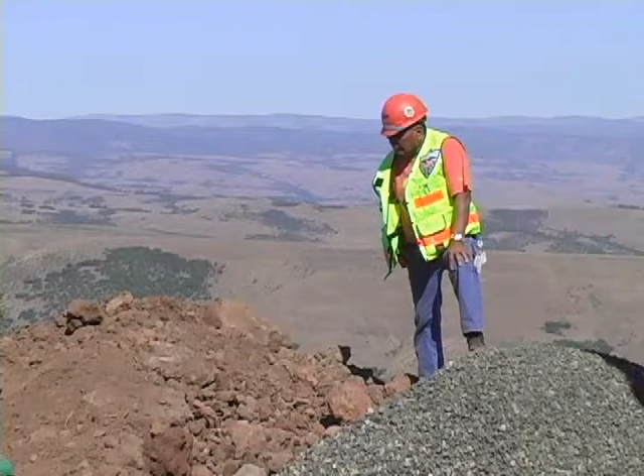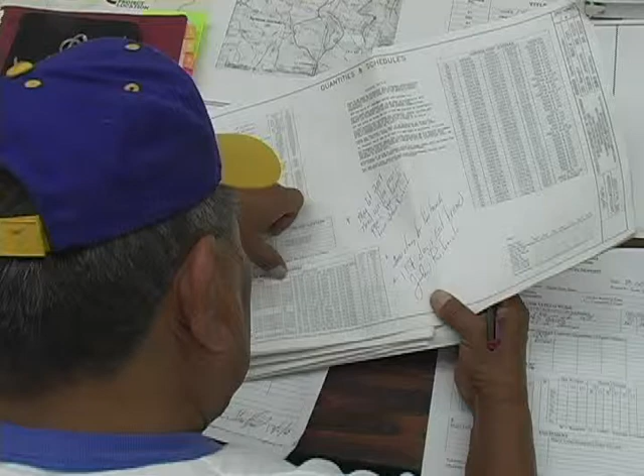The Road Construction Inspector, or CI, has a very important job to do. It is up to him or her to make sure that a road construction project is being carried out as planned, in every detail. Without proper inspection, the final product, which is a road that thousands of people may travel for many years, could fail.

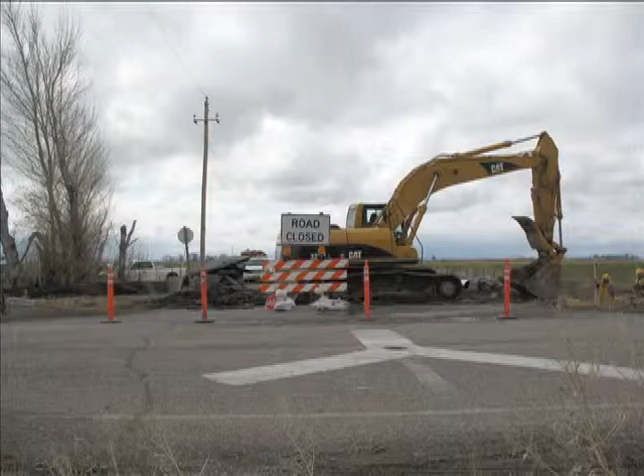This failure may cost your tribe thousands of dollars to repair. Even worse, it could cost residents of your reservation their very lives.

Welcome to this presentation on Tribal Road Construction Inspection and Documentation. During this program, we'll explain the duties of the construction inspector and demonstrate the proper ways to carry out those duties. We'll closely examine the various reporting forms and other documents that you'll be using both in the field and in your office.

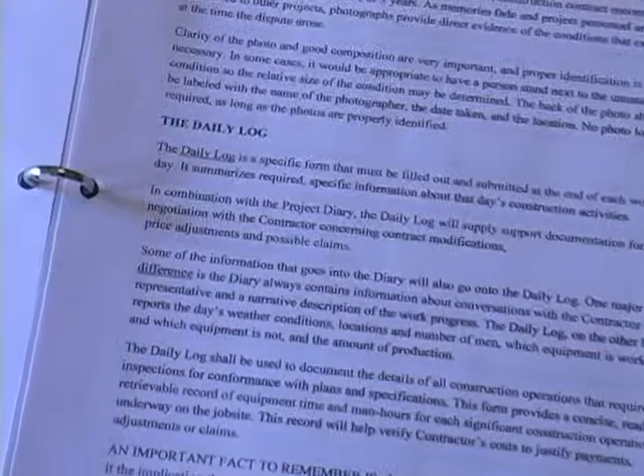The information we're presenting here is also available in the Road Work Ahead guide that accompanies this DVD, which contains more in-depth information on this subject. The guide also contains definitions of some of the terms we'll be using. We've got a lot of ground to cover here, so let's get started.

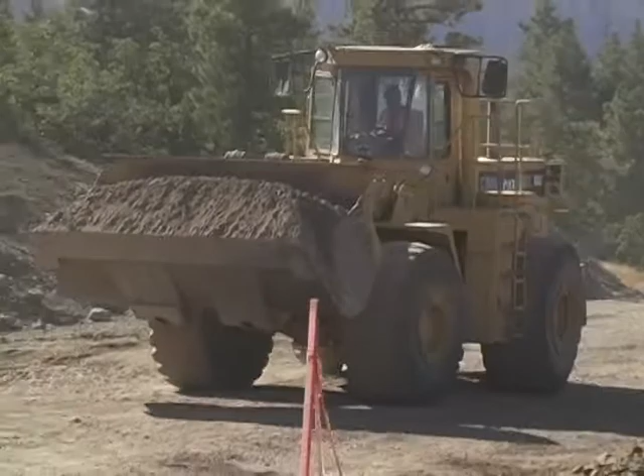To be a construction inspector, there are three basic things you must be able to do: observe, record, and communicate. That is, observe the details of what's happening at the construction site on a day-to-day basis. Record what you observe in a standardized way on a regular basis, and communicate what's happening to other individuals and agencies that need to know.

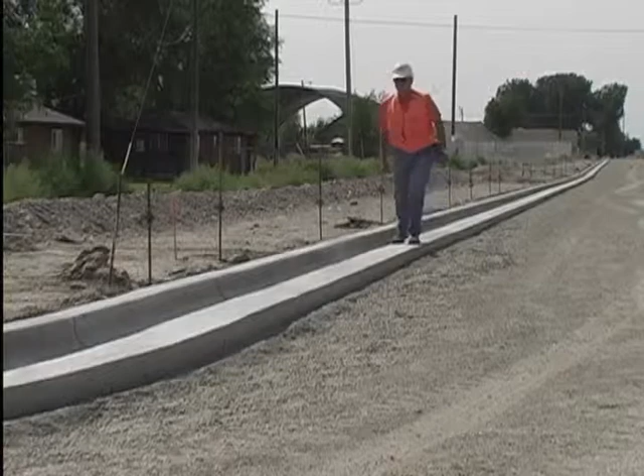In order to do the job properly, you should be the first person on the site each morning and the last person to leave at the end of the day. That way, you don't miss any critical construction activity. The main purpose of these tasks is to be able to confirm and document that the construction contractor is complying with the terms of his contract, which assures overall quality of the project and allows the project owner to make payments to the contractor.

Every approved construction project starts with a set of plans and specifications that provide the details on all aspects of the job. It is part of the job of construction inspector to be thoroughly familiar with these plans and specs. So, before ever going to the construction job site, the inspector must take time to review these documents and mark up or use post-it notes to cross-reference items to watch.

Every construction project accumulates various documents as the project progresses, and these documents must be organized and safeguarded, so they are usually kept all together in the project master file. This file box is something an inspector needs to access almost every day during a construction project. Now let's review the official duties of the construction inspector. If you have a copy of the guide, you may want to follow along in Part 1.

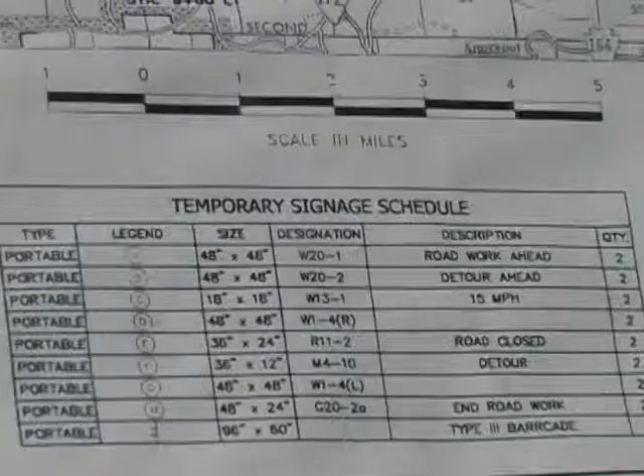Number 1. The inspector must be able to read, comprehend, and interpret all elements of the project plans and specifications. This includes such items as addenda, change orders, detail sketches, temporary traffic control plans, erosion and sediment control plans, as well as sampling and testing schedules. For definitions of these items, check the glossary in the back of the accompanying guide.

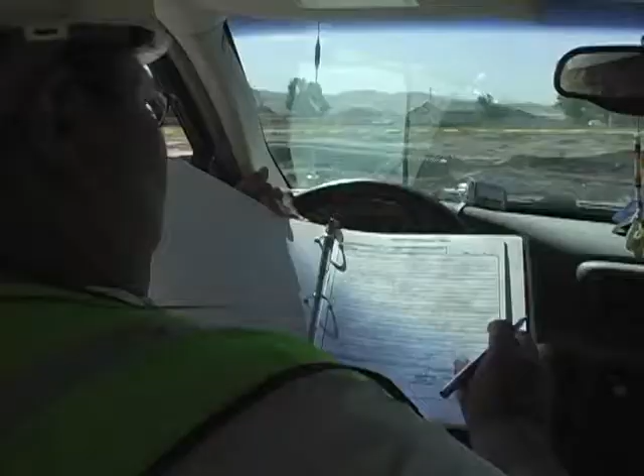Number 2. The inspector must keep and maintain daily construction reports of field observations of construction activities, materials, testings, equipment, employee working hours on the project, delays, weather conditions, unusual activities or events, mishaps, and accidents that occur at the job site, all being referenced to centerline stationing and pay items.

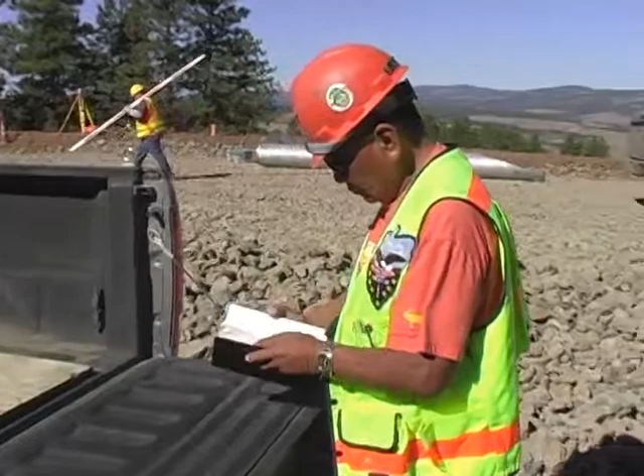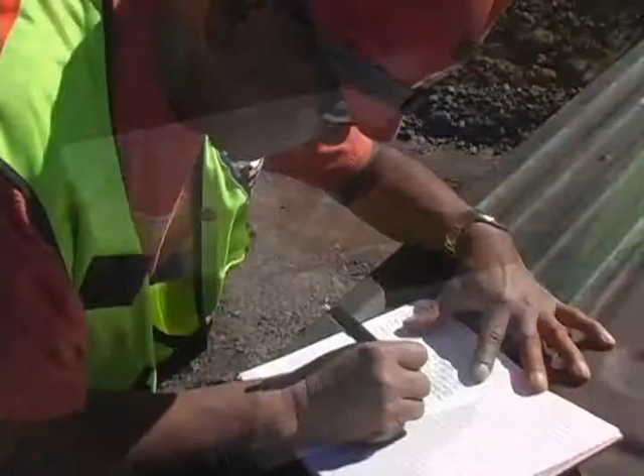Number 3. Keep and maintain a project diary for recording working hours on the project site, data relative to the extra materials or deductions, weather effects, list of visitors to the site, conversations and discussions of differing opinions or disagreements with the contractor that may result in disputes or delays, including rejections and reasons. The daily diary should be signed by the field representative each day.

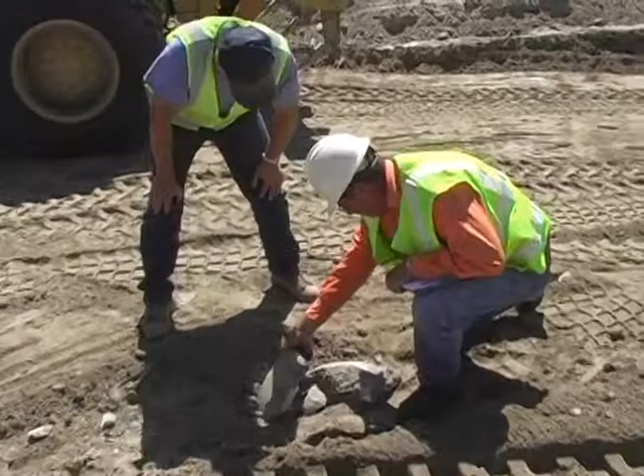Number 4. The inspector must be able to identify and note any unsatisfactory materials or work. Clearly inform the contractor superintendent of any unacceptable or defective work or materials with a written follow-up and copies sent to the COR. Number 5. Check that all materials arriving on the project site are in compliance with the project specification requirements. Obtain test reports, analyses, and manufacturer certificates prior to the incorporation of materials into the project.

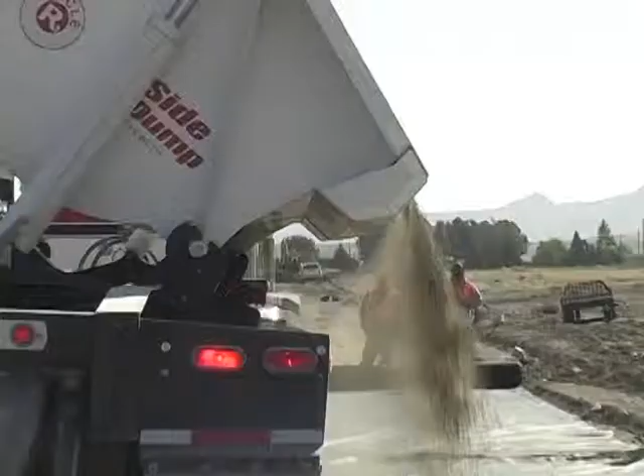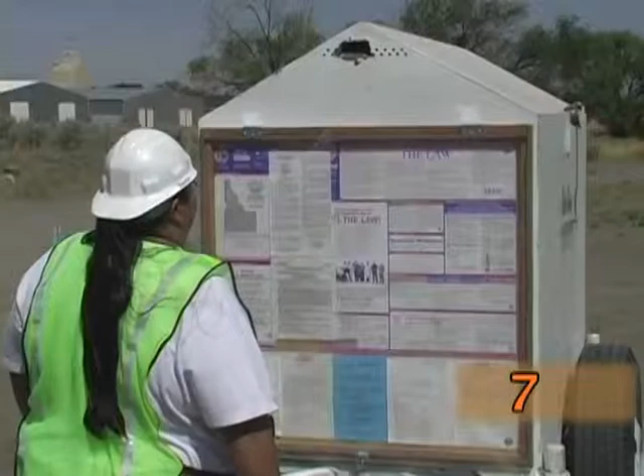Number 6. Confer with the COR and contractor on the monthly estimates for pay requests. Verify the work completed and assure quantities indicated on the estimate match the recorded quantities. Number 7. Make sure that all permits are obtained and posters to be publicly displayed are in place.

Number 8. Attend the pre-construction conference, progress meetings, and any project-related conferences when contract work activities permit. So to recap, can anyone tell me the 3 basic tasks a construction inspector must be able to perform? Yep. Observe, record, and communicate? That's right. Observe, record, and communicate.

Now, before we go on, does anyone have any other questions? Yep. If a contractor is out of compliance in the contract, are you supposed to make him stop and tell him what he's doing wrong? No, the inspector can't tell the contractor to stop work, nor can he tell the contractor what to do. And we'll cover this in a little more detail in a few minutes.

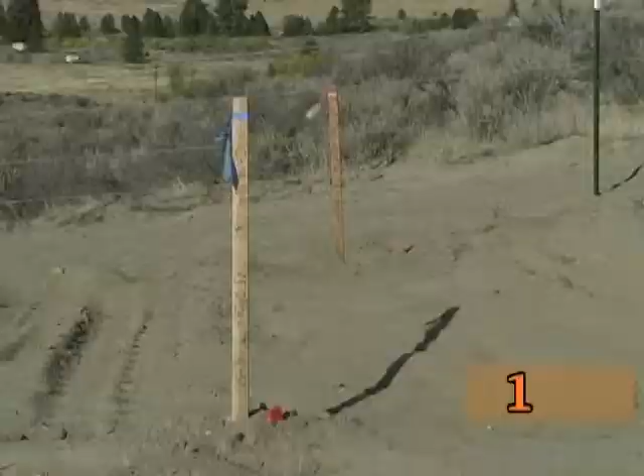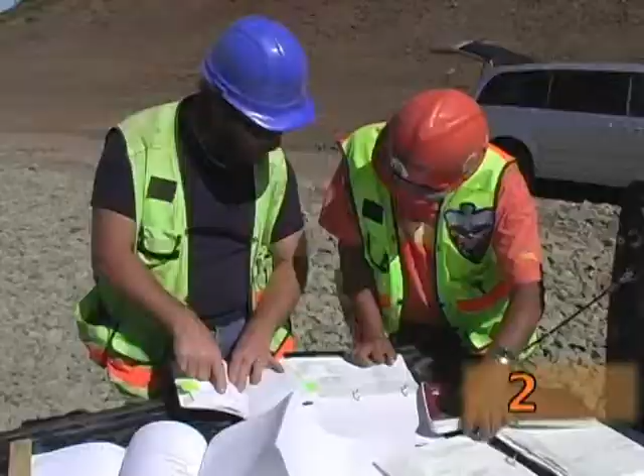The inspector's duties include monitoring the quality of materials and the quality of work, as well as interacting with the contractor's representatives on a day-to-day basis. These duties are as follows. Number 1. Check stakeout, survey, or other prescribed specifications required in order to perform the work included in the construction contract. Number 2. Answer technical questions of the construction contractor, clarifying but not changing the construction contract requirements.

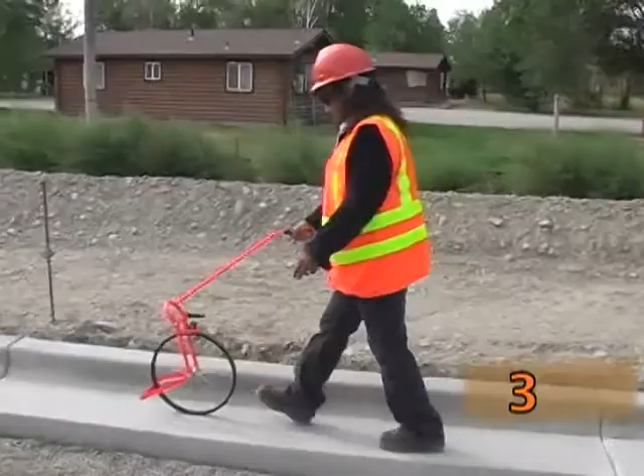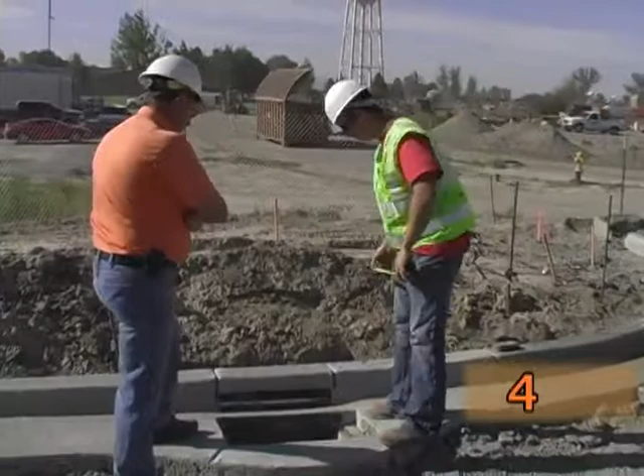Number 3. Measure or verify the quantities of work performed for the project owner's receiving report. Number 4. Make qualitative or quantitative judgments that may be required by the contract at the site of the work. For example, determining if specific sections of guardrail can be salvaged.

Inspectors' duties include providing current documentation on project progress, using systems and methods developed by the tribe, by BIA, or the government agency responsible for the project. This documentation will include these components. Number 1, the inspector's daily diary, which provides narratives of activities, events, and discussions that have occurred at the job site. Number 2, the daily log, which records all contractor activities, including number of hours worked by each contractor employee and equipment location.

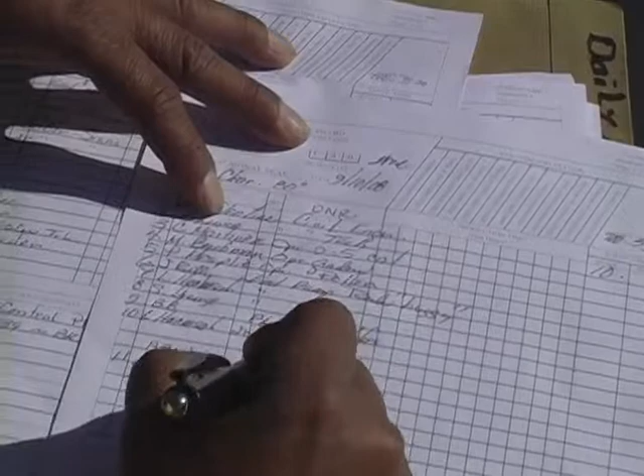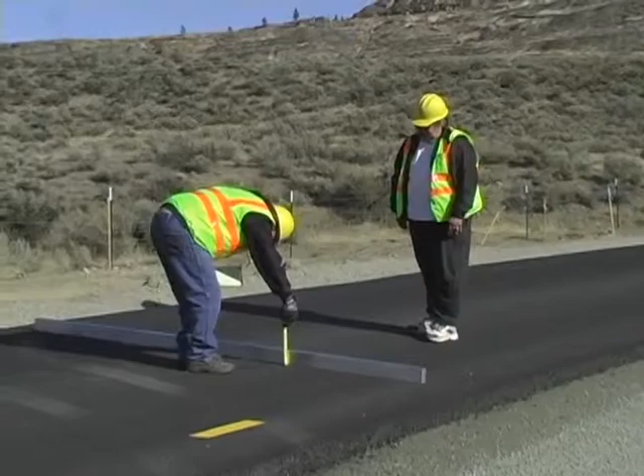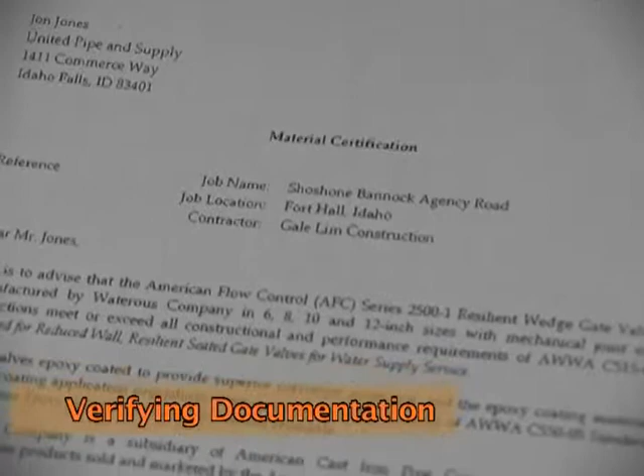Number 3, results of measurements, computations, and other activities supporting payment for all items in the contract. We'll cover this in more detail later. Number 4, a monthly report and estimate of quantities to keep the project owner updated on the status of the project. Number 5, test results, measurements, and other documentation verifying the adequacy of the contractor's quality control systems and compliance with the terms of the contract.

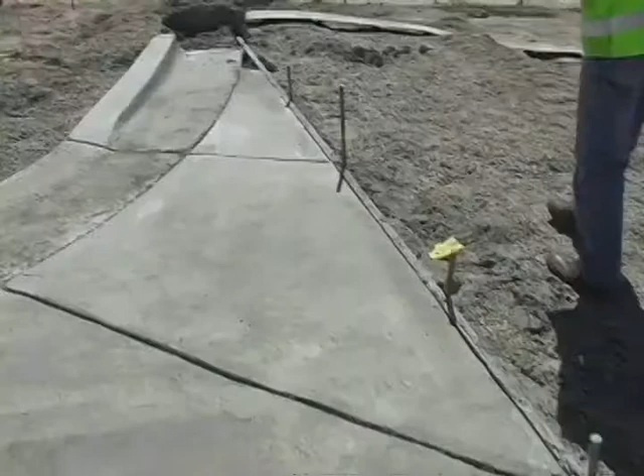Number 6, labeled photographs of the different construction operations, providing a pictorial record of the project's construction stages. We'll discuss this in more detail later. Number 7, survey notes and records of other measurements that are for the project owner's final record to check, adjust, or locate the various features of the project as they are constructed. An original of each of these items should be provided to the project owner and becomes property of the project owner.

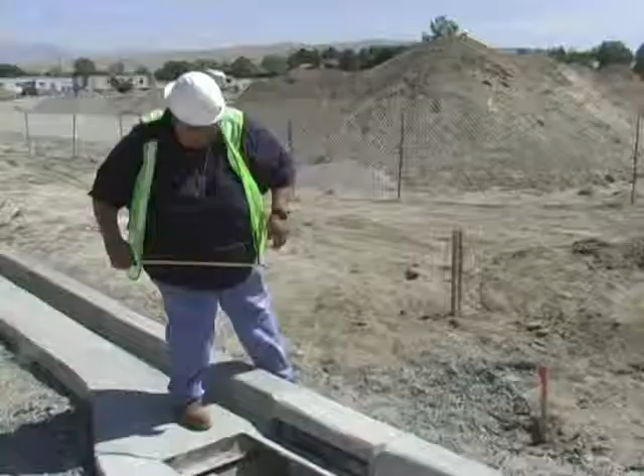We had a question earlier about what an inspector can and cannot do on a job site. Inspectors have very limited authority. Essentially, an inspector doesn't have the authority to tell anyone on the project what, when, or how to do anything. Remember, the inspector is there to observe and record. Also, an inspector must record any deviation from the project contract plans and specifications and notify the contractor and the project manager. However, as I said earlier, the inspector cannot stop or cause any delays of the work in progress, except for imminent life-threatening situations.

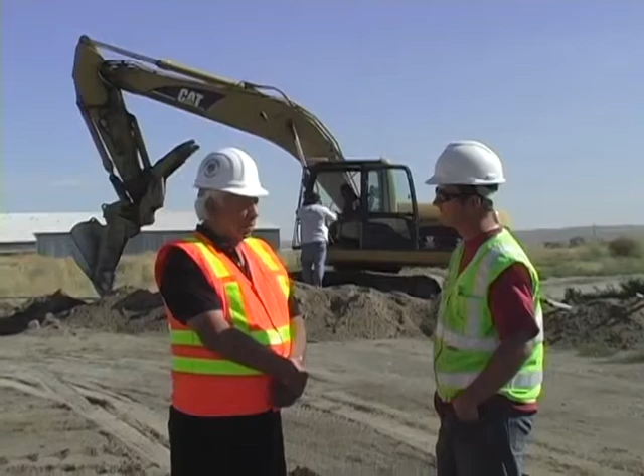Discussions concerning the contractor's organization, equipment, construction methods, or efficiency shall be handled by the project engineer, not the inspector. Also, orders that alter the contract specifications or create additional liability to the project owner must come from the project engineer. The inspector shall not advise or give instructions to contractor personnel regarding construction procedures or techniques, but should only ask what they are doing.

What if you see an unsafe practice on a job site? Say a dozer operator is not wearing his hard hat. Record what you observe in your diary, then inform the contractor superintendent and the project manager about what you saw.

It is the responsibility of the inspector's employer to provide the proper attire and equipment for the project. This is for the inspector's own safety and effectiveness. An inspector must wear to the job site a hard hat, steel-toed safety shoes, safety vest, and other items such as goggles or dust masks when needed.

The necessary bound diaries, daily and weekly report forms, and other documents must be provided by the inspector's employer. Items that construction inspectors often use in the field include infrared thermometer, engineering scale, calculator, measuring tape, and field guide for work zone traffic control.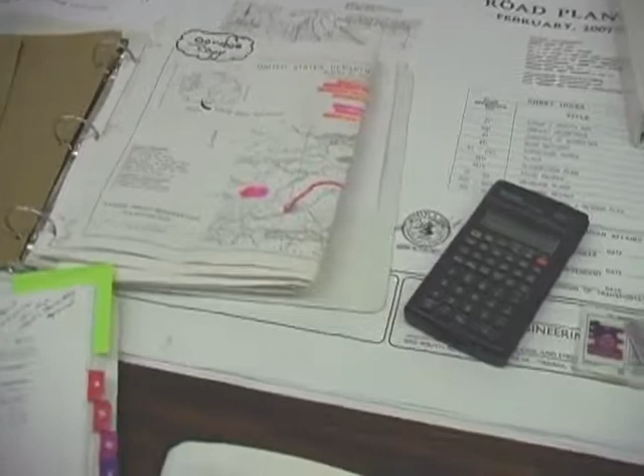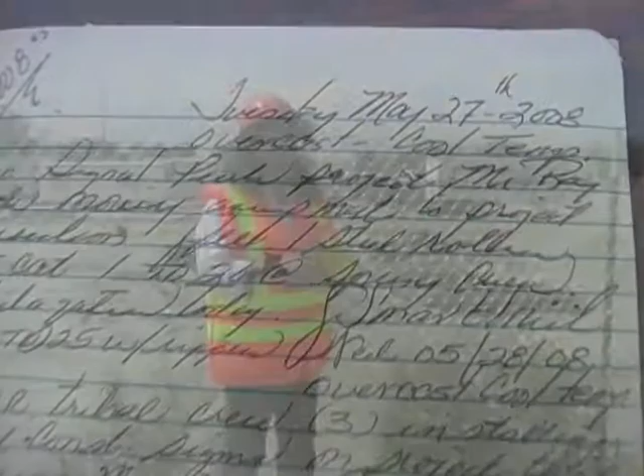The project diary is one of the most important records made during the progress of construction. Diary entries should therefore be factual, concise, complete, legible, and written in ink. When properly maintained, the project diary provides valuable information and evidence when disputes about the project arise later.

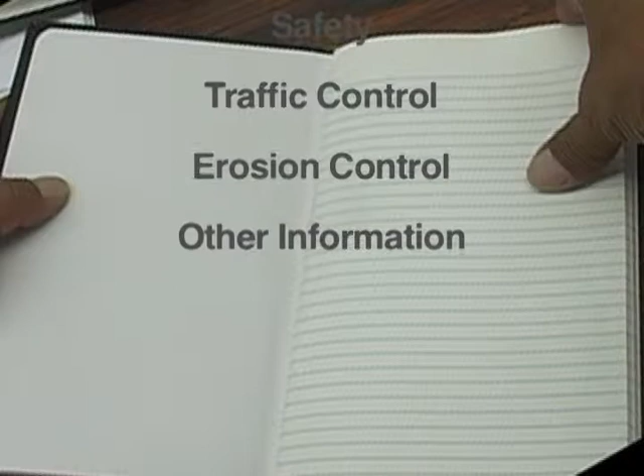You should include the following information in your diary: date, names of visitors to the site and purpose of visit, progress of construction work, explanations of why work was not completed on schedule, accidents that occur on site, the substance of important conversations with the contractor, comments on construction safety, comments on traffic control and signage, discussion of erosion control and other environmental concerns, any information not covered in other reports that may have a bearing on future developments.

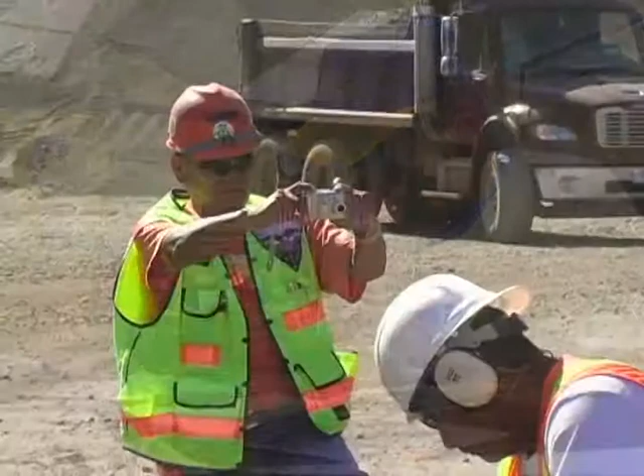Remember to sign each day's entry with a full signature, not just initials. The diary is considered to be an official government document. It is to be safeguarded and turned in with all other project records at the conclusion of a project. The use of tape recorders, sketches, and photographs during construction is considered very beneficial, particularly if disputes arise later. Tapes, drawings, and photographs should be noted in the diary.

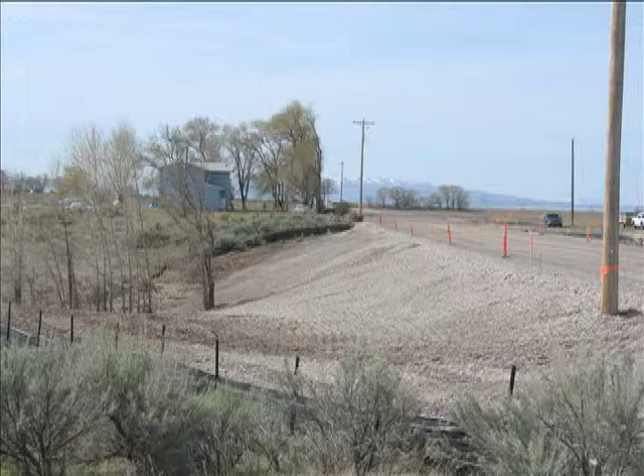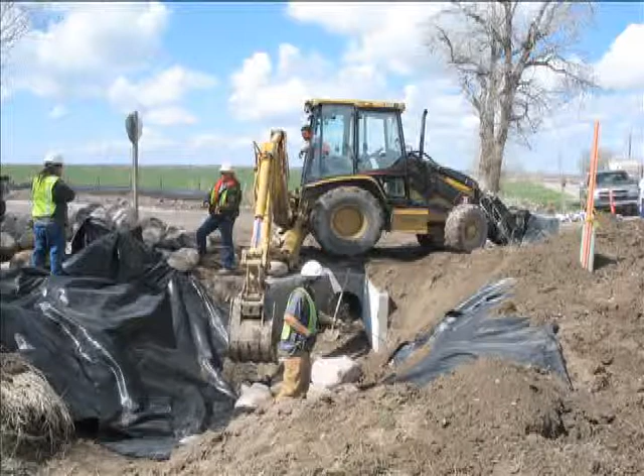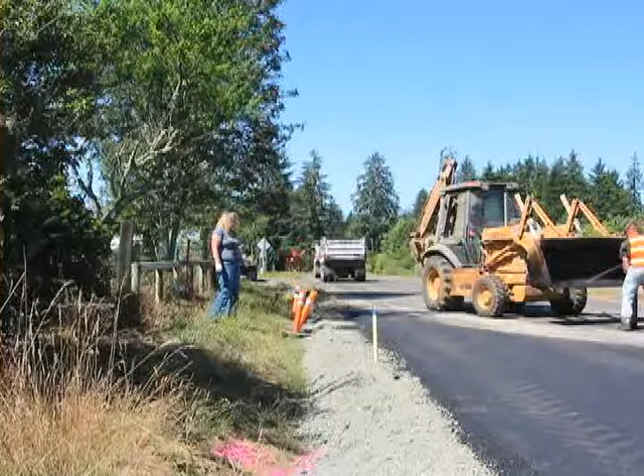Photographs can be an important part of a project's records. The old saying, "A picture is worth 1,000 words," applies here. Photos serve to document unusual occurrences, such as mudslides, cave-ins, floods, or actual conditions when a contractor alleges differing site conditions. They can also document unusual construction features, non-conforming material or methods, accidents involving death, personal injury, or property damage, encroachments within the right-of-way, and other such occurrences and conditions.

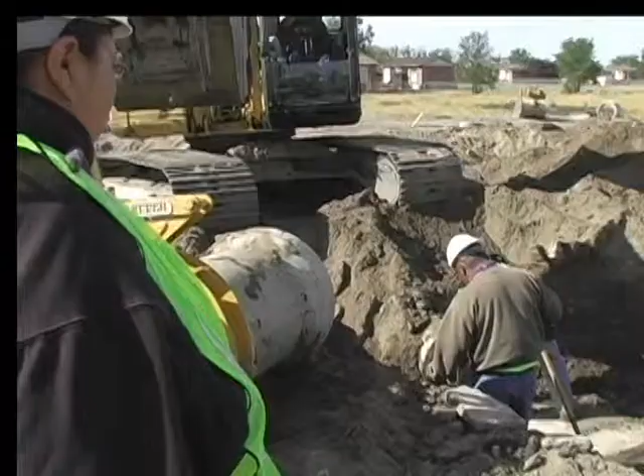They are invaluable as evidence in case a controversy develops during the construction contract which results in litigation. They are especially useful when a construction contract encompasses a long period of time, as much as 2 or 3 years. As memories fade and project personnel are transferred to other projects, photographs provide direct evidence of the conditions that existed at the time the dispute arose.

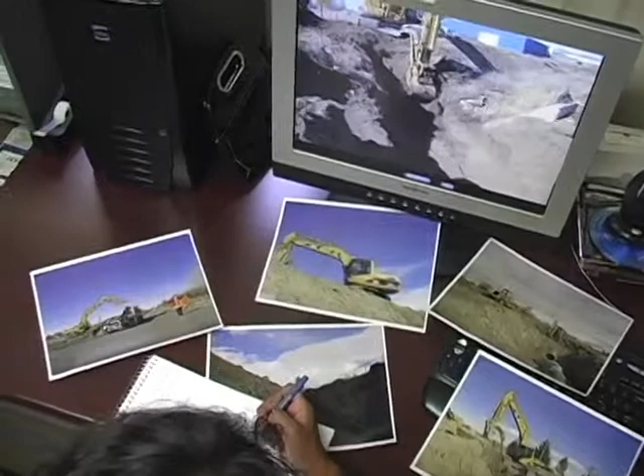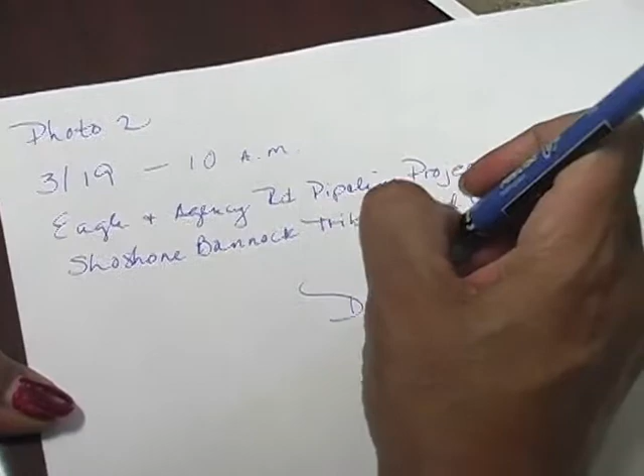The daily log is a specific form that must be filled out and submitted at the end of each workday. It summarizes required specific information about that day's construction activities. In combination with the project diary, the daily log will supply support documentation for negotiation with the contractor concerning contract modifications, price adjustments, and possible claims.

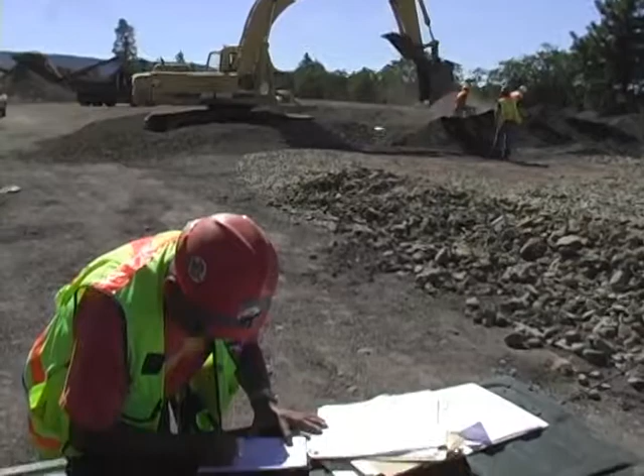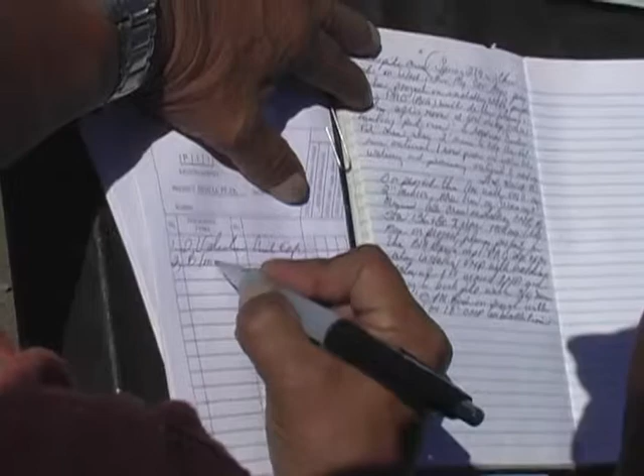Some of the information that goes into the diary will also go into the daily log. One major difference is the diary always contains information about conversations with the contractor or his representative and a narrative description of the work in progress. The daily log, on the other hand, reports the day's weather conditions, locations and number of men, which equipment is working and which is not, and the amount of production.

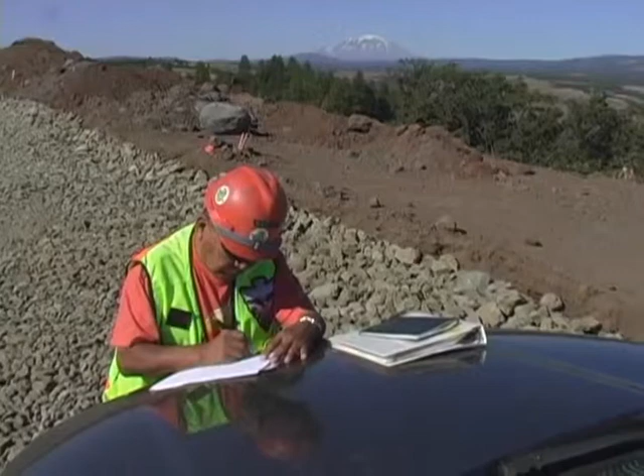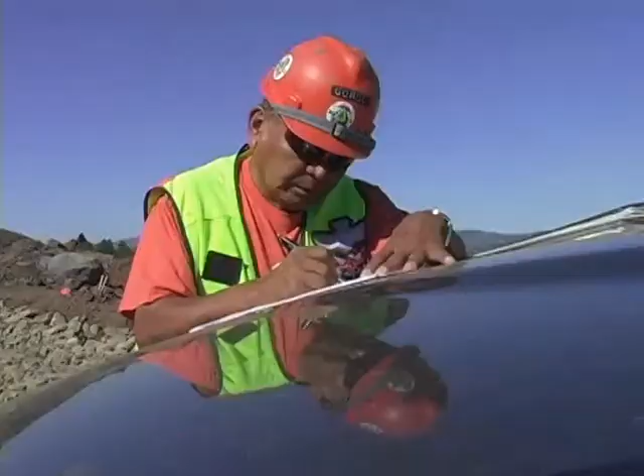The daily log shall be used to document the details of all construction operations that require inspections for conformance with plans and specifications. This form provides a concise, readily retrievable record of equipment time and man-hours for each significant construction operation underway on the job site. This record will help verify contractors' costs to justify payments, adjustments, or claims.

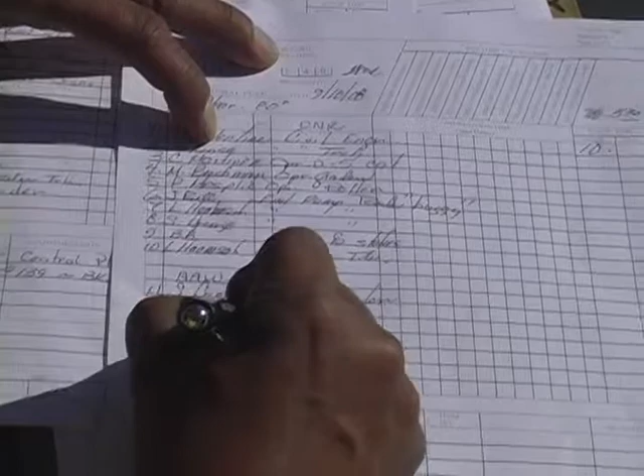An important fact to remember is the failure to record an event in the log carries with it the implication that the event did not occur or was insignificant, and also threatens the credibility of the entire log. The inspector's daily logs are to be filed in the project master file at the completion of the project. Yes? Do weather conditions go in the diary as well as the daily log? You can put them in both if it's helpful, but that information is required in the daily log.

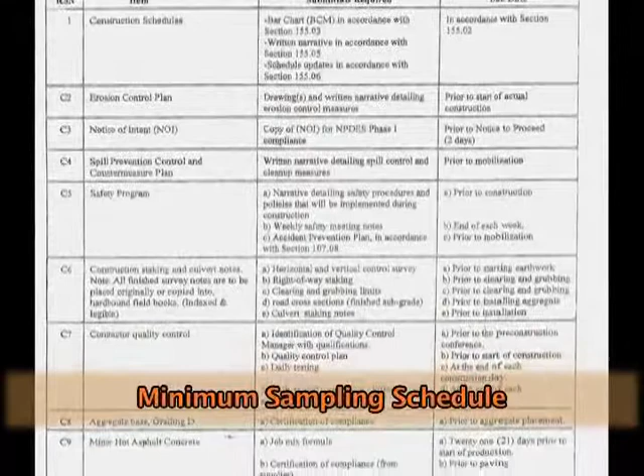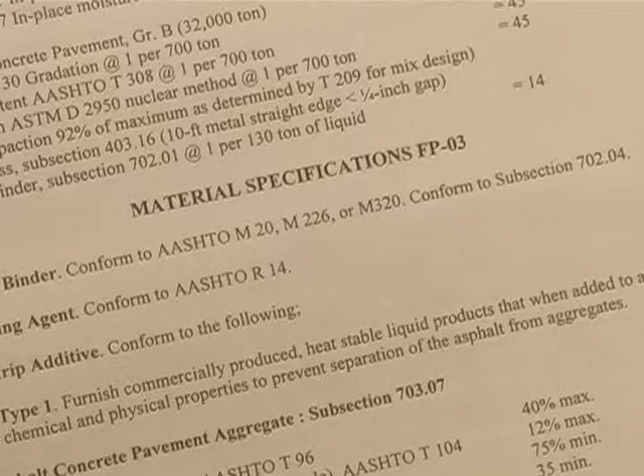A part of the project specs for every construction project is something called the minimum sampling schedule. This document contains the requirements for minimum testing and sampling of the materials delivered to the project. This document dictates what type of materials testing and sampling must be done, and it is part of the inspector's job to track these items. The purpose of the sampling and testing performed on the projects is to determine whether or not materials being used match the project specification. There are several items used to document sampling and testing on the project.

First, there's the daily volume record. You use this form to record the delivery of all materials for the project. It provides spaces to enter the load number, truck number, time of day, location, and the volume of material. Material receipts and weight tickets that come with every load are stapled to the back of this form because they verify what you've entered on the daily volume record. A new daily volume record sheet is started each day of the project.

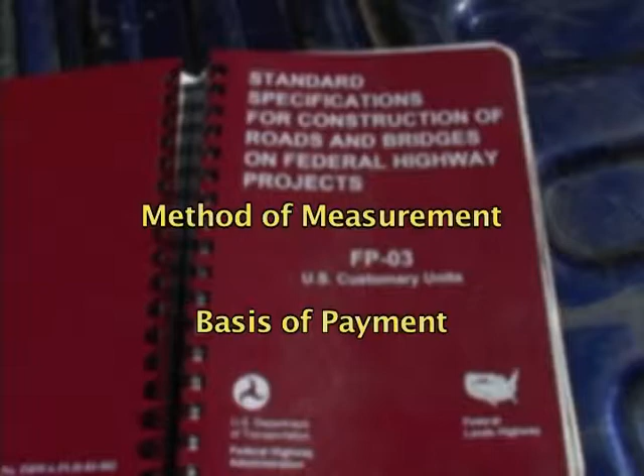Project specifications contain sections labeled Method of Measurement and Basis of Payment for each item of work. These dictate what units of measurement are to be used for the materials and on what basis a contractor can be paid. The daily volume record is used to track these items and to check against planned quantities. These records are transferred to the daily log each day.

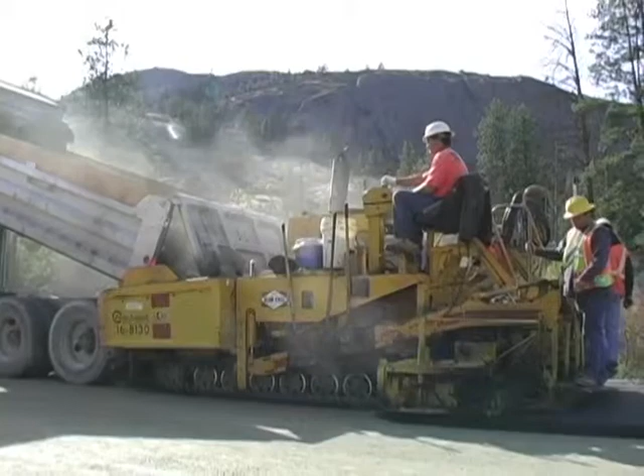The construction contractor must provide certifications of compliance for all materials to be placed on the roadway before they are installed. These certificates are to be retained at the job site and are to be included in the project master file. Inspectors must assure that every delivery meets specifications by checking the bill of lading. More specific instructions about asphalt inspection are located in the accompanying guide.

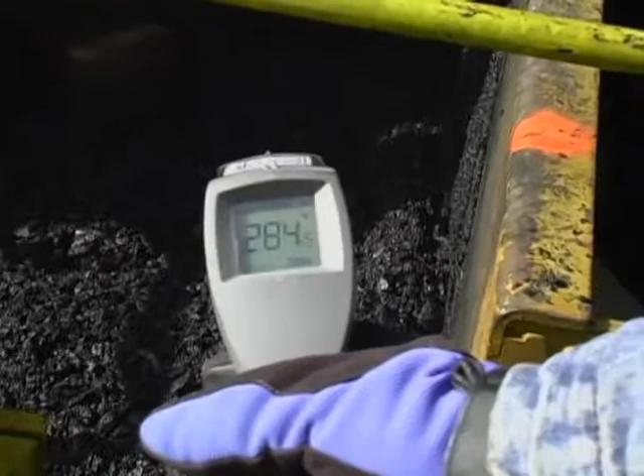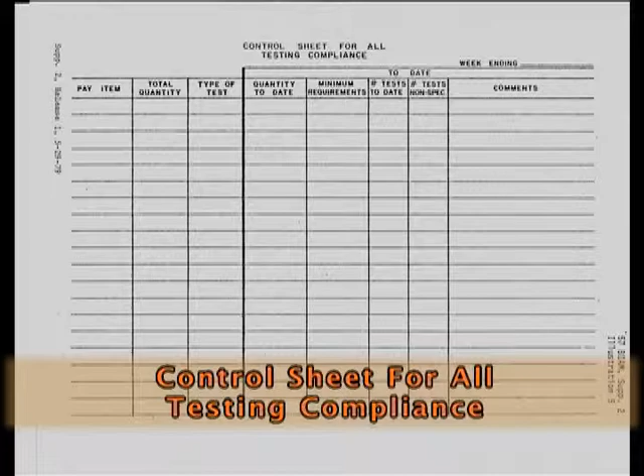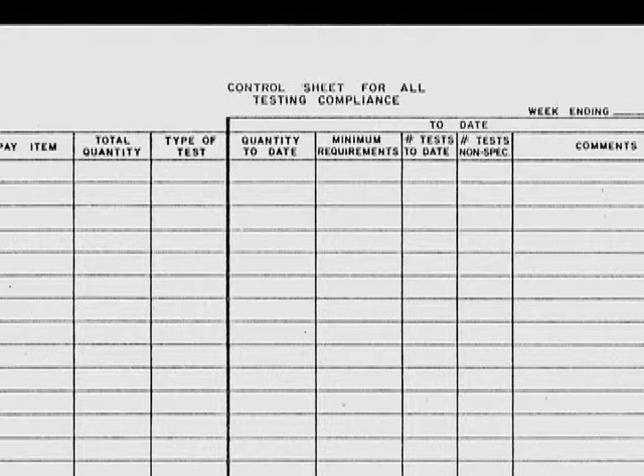Next, there's a control sheet for all testing compliance for each project. This sheet indicates the minimum tests to be taken for each item of construction to assure that adequate samples and tests are conducted during each phase of construction. The original of this form is maintained by the inspector, and a copy is submitted weekly to the project manager.

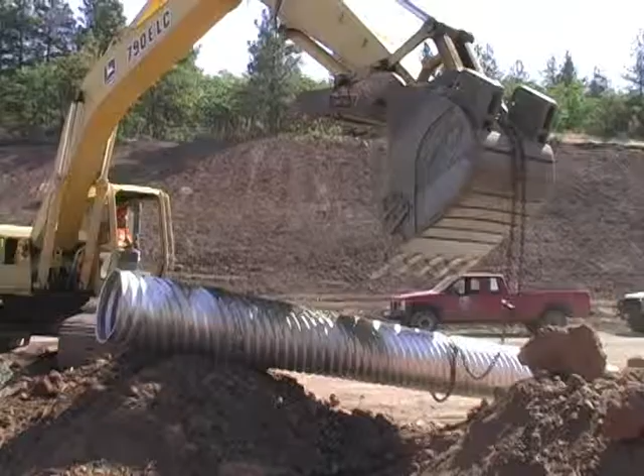Not all projects require the placement of culverts, but on those that do, detailed records of their installation must be kept. A document known as the culvert book is the primary source of information regarding the installation of culverts, if project plans call for them. Using the project ledger pages for documentation, records for the culvert book include the record of structural excavations if payment is provided for, complete and detailed stakeout notes for each installation, including sketches, stake locations and offsets, and information on stakes.

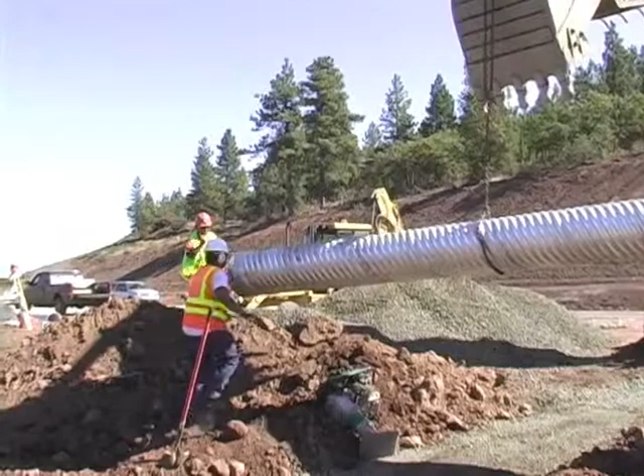Description of structure such as cattle guard, culvert, reinforced concrete box culvert, bridge, catch basin, drop inlet, etc. References to material certification must be included. Size, length, location, skew, invert elevations, grades, date of staking, and date of installation or construction of structure with test notation and results. Finally, quantities of rock, steel, and/or concrete, slope protection, riprap, or other items used in conjunction with the structure.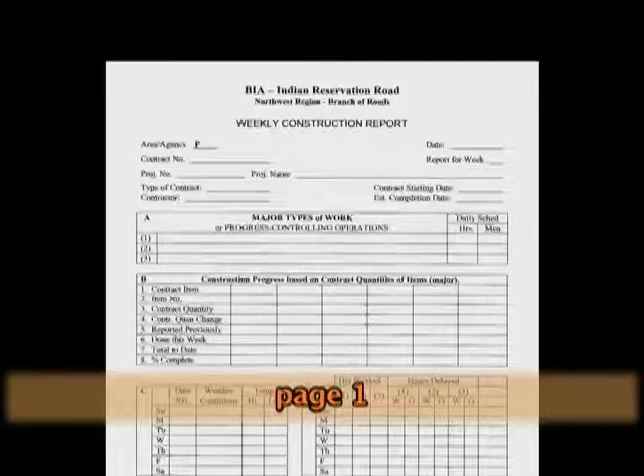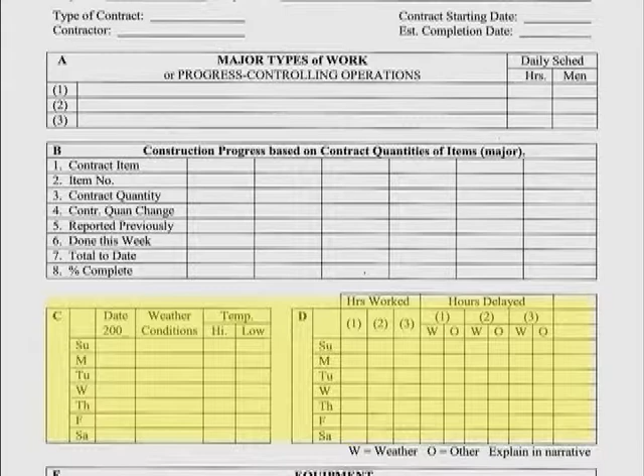The Weekly Construction Report is a valuable tool for summarizing key information on a weekly basis. This report keeps the project owner and the contracting officer up to date on the project's progress. This report calls for very specific information to be summarized and generally covers major portions of the project as follows: the major types of work being performed during the week and units accomplished. The construction progress being made is indicated by individual contract deliverables and % complete. Weather conditions and amount of man-hours clocked for the week. The equipment put into or taken out of service, and brief narrative summaries including engineering comments, overall construction comments, plus general remarks on the issues affecting the project's progress, including delays.

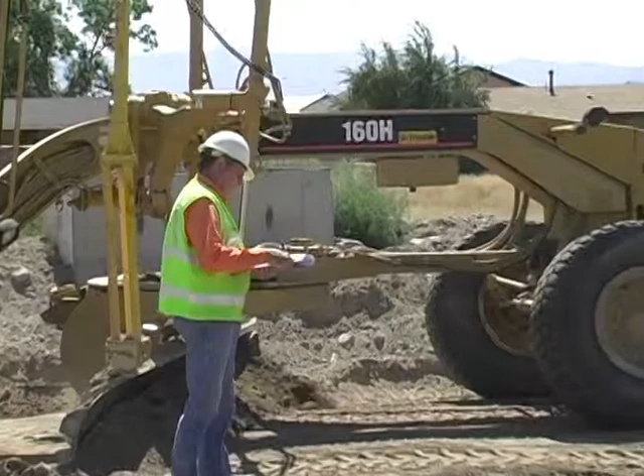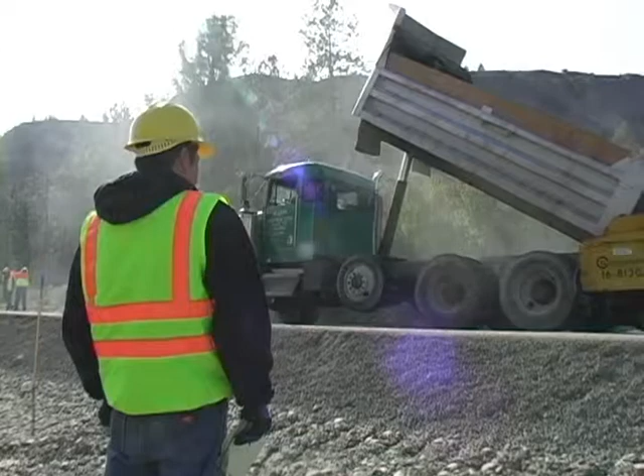In summary, I'd like to stress that the construction inspector plays a critical role in the execution of a road construction project, a project that could take several months and cost millions of dollars. Without the alert eyes and ears of the inspector, this project may not meet the standards and specifications it takes to create a safe, long-lasting byway that reservation residents may use for decades to come.

To review the information presented here, or for more information on the important aspects of the inspector's job, refer to the manual, Roadwork Ahead, that accompanies this program.